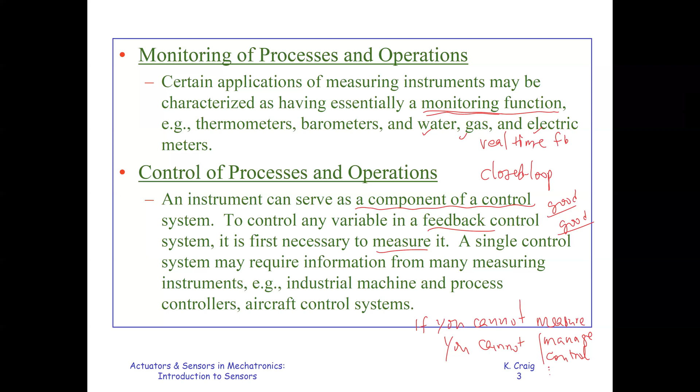A single control system may require information from many measuring instruments, so your decision could be based on multiple sources of information—like in industrial machine and process controls, aircraft controls, and so on. Your dishwashers, washing machines, and dryers also have control systems inside.

This is the first and second purposes of instruments and sensors. Now the third one: you design experiments, find new sensors, and make new discoveries, which is also very important. But as mechatronics people, we focus on 1 and 2. That's why we explained here.

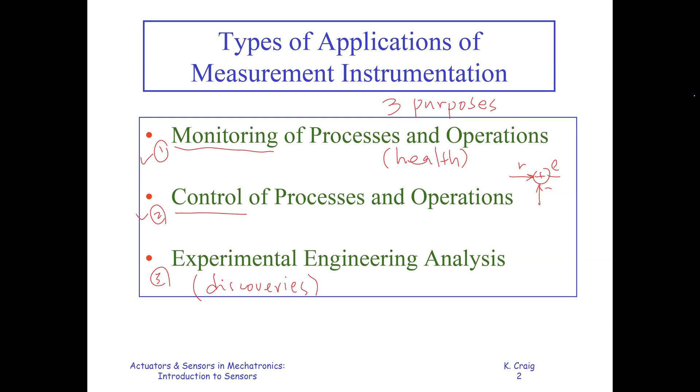So let's take this big picture. This is the plant to be controlled. You have some disturbance input in here—it could go in front or after, we put it in the middle, it's fine. Then we have the output, which we call Y. You have an input U, and you have disturbance D.

In process industry, they call Y the controlled variable, meaning a variable under control. So this controlled variable, you have to sense it—you have a sensor here. After that, you compare it to a desired value, like a reference. Sometimes we call this the set point.

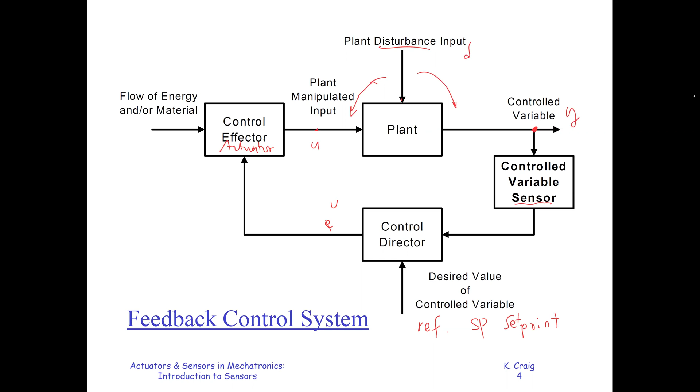Then we compare this, using the difference, which goes through the control director—so you have a control effector, like an actuator. Inside here is not just U, but probably a control variable, call it V here. So this is a typical feedback control system, and in all mechatronic systems you have this type of control.

For engineering analysis, you can do physics theoretical-based study, or you can base it on experimental study. To do experimental study you need sensors. Most of the time you need both—it's an iterative process.

Features of theoretical methods to study the engineering system: it's based on general physics principles, needing some simplification so you can establish a theoretical prediction. But this is always different from the real behavior—the model always has a difference from the actual physical system.

We talked about this—all models are wrong, and some of them are useful. Who said that? G.E.P. Box, his last name is Box. He has another colleague called Jenkins, so we talk about the Box-Jenkins model.

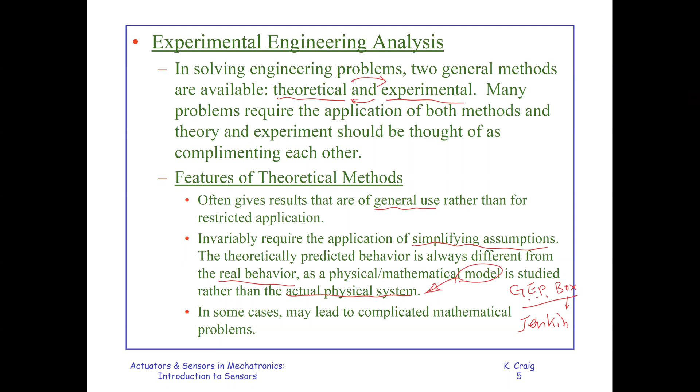This could be very complicated. A laboratory facility is not required in this case, since you only do simulation. You have Simulink, and in Simulink you have SimScape—SimScape Electrical, Hydraulic, and many other different packages.

However, a lot of the time we focus on experimental methods just for the specific system under investigation. In this case you are studying the real system, so you don't have to use simplifying assumptions—you're already running on an actual system. So we always view this as the true behavior of the system, and the measurements have to be accurate so we get a true picture.

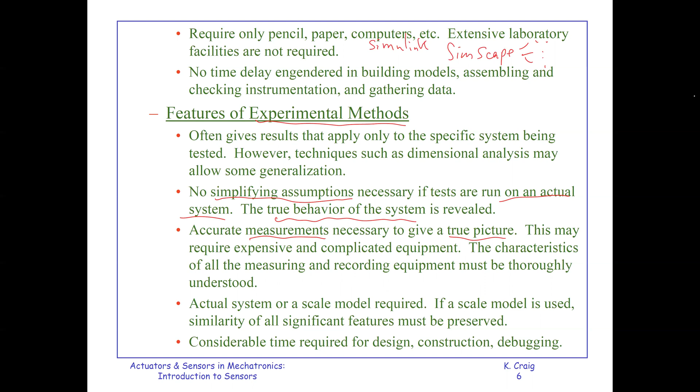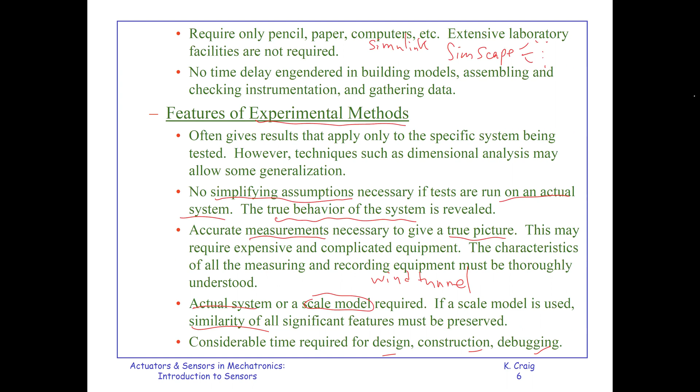Sometimes sensor equipment may be complicated and expensive, so sometimes you cannot measure directly on the actual system—you might use a scaled model. For example, you cannot put a full-scale aircraft into a wind tunnel, so you put a scaled model into it instead, and similarity of all significant features has to be preserved. This measurement method to explore engineering principles probably needs a lot of time for design, construction, and debugging of the experimental methods.

There are three purposes of measurement: sometimes you use sensors for monitoring, for control, or for analysis and discovery. The boundary may not be very clear cut—the category decided on may depend somewhat on your point of view, and the looseness of this classification should not cause any difficulty. These purposes may sometimes overlap or combine, or all three may apply at once.

So we use a lot of computers for these machines and processes. It is not the critical system element in terms of either technical or economic factors. So today, everywhere you can see computers, and even in your car, you have 20-some computers embedded inside.

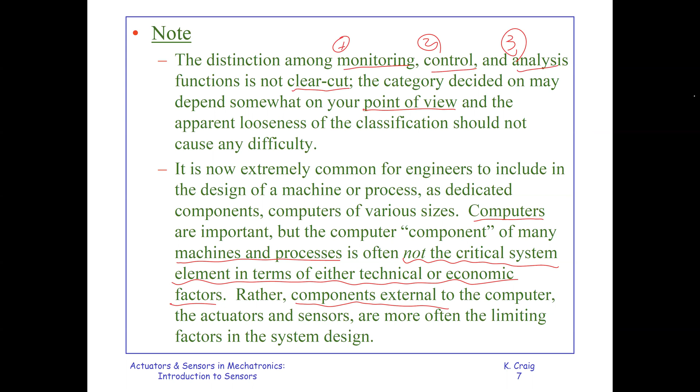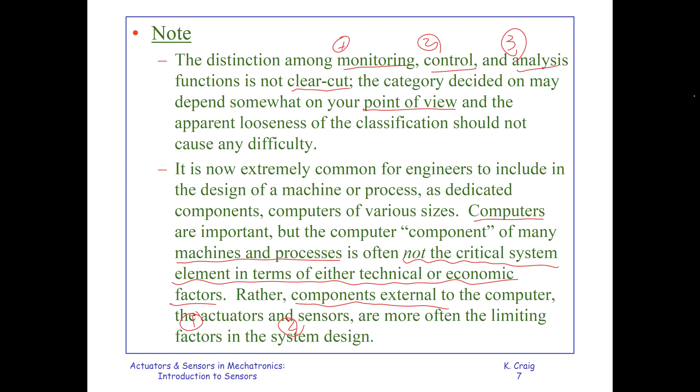So those components external to the computer are mainly in two categories. One is actuator, another one is sensor. In real systems, they are usually the main limiting factor or roadblocks for you to succeed. So it's healthy to discuss a generalized configuration and a function description of a measuring instrument.

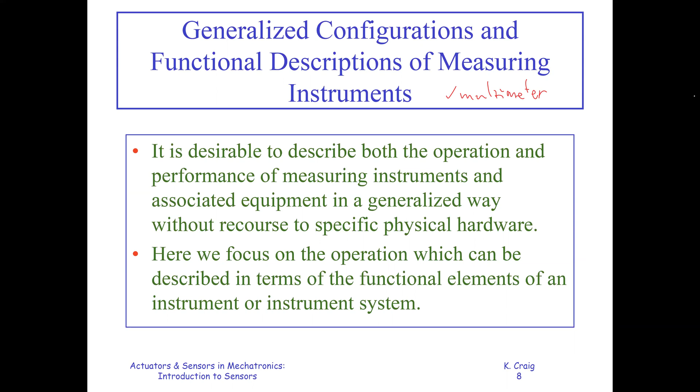So whatever instrument you have in hand, for example, let's say you have a multimeter you have been using in the lab setting, okay? So what is the general configuration there? I think it's a good idea we focus on this picture. Then we see a real instrument to see what each of the elements is.

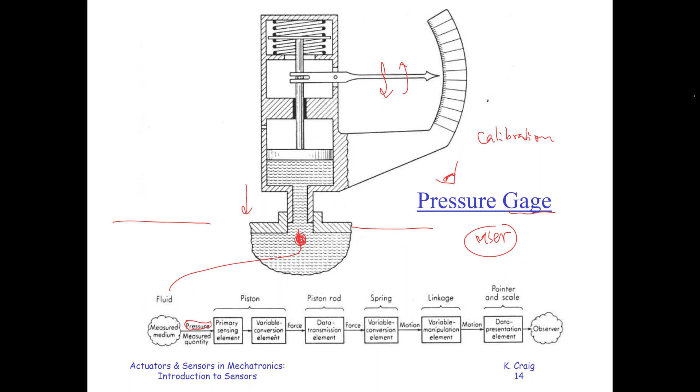This is one body, it's a piston that goes up and down. The piston is considered the primary sensing element. This is actually a conversion, it goes up and down. This is the piston rod. It's a kind of data transmission element. You transmit the force. I put an arrow here, the force acts on the rod, and the rod transfers the force. You also have force here. So the rod is data transmission.

These are the springs. This is called a variable conversion element because when you add force to the spring, it generates an up and down motion here. Then you do variable manipulation of the motion. This is the pivot point, and that's called a linkage. The linkage transfers the up and down rectilinear motion into a rotational motion. So this is rotational motion, and this is rectilinear, linear motion.

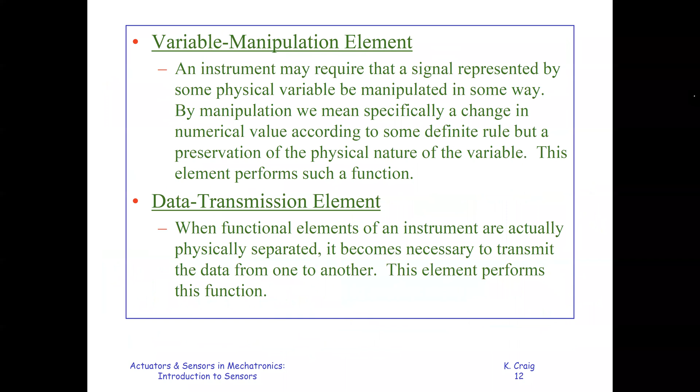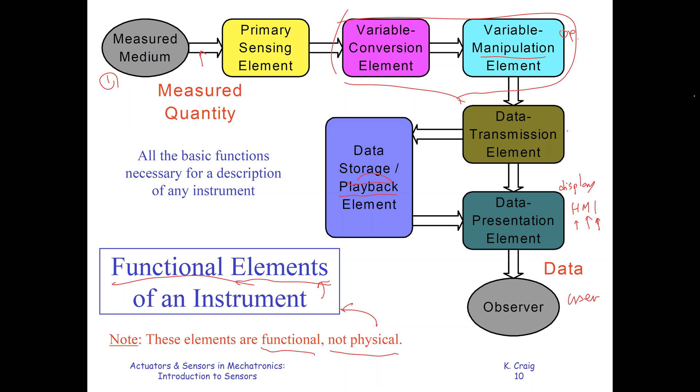So let me go through the functional elements to you again. So from the media, sensing element, variable conversion, variable manipulation, data transmission. But sometimes this could be combined, okay? So it could be combined as one. Okay, so I don't have to go through this text. I already explained it to you.

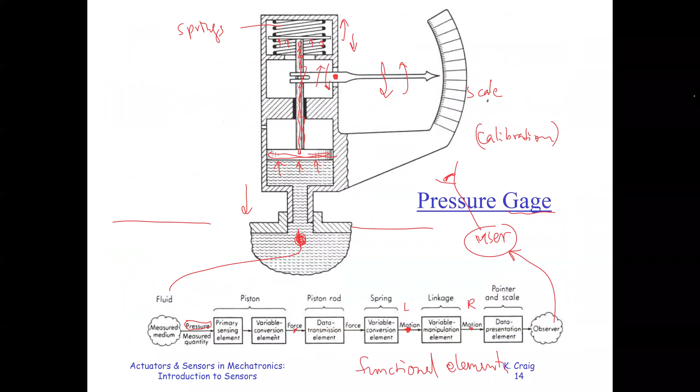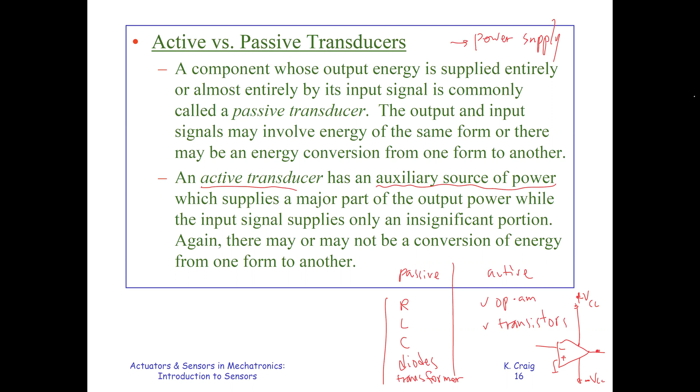All these are passive, but you remember in the op amp, you need the power supplies, plus VCC, minus VCC. So the output actually will be saturated by the maximum power supply. So that's called an auxiliary source of power supply. So it's an active transducer.

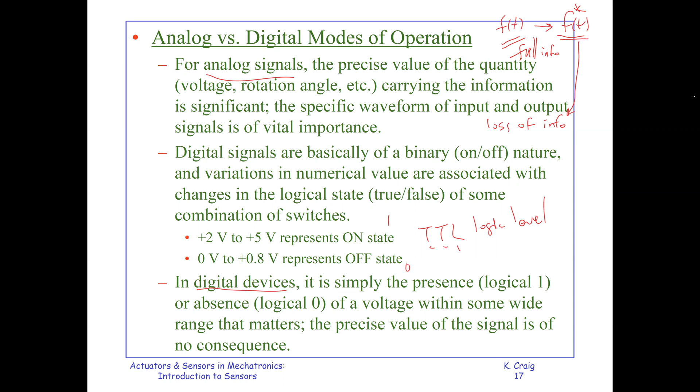Because of this logic definition, we can see that digital devices are tolerant or robust with respect to the noise. So, although individually they may not be very accurate, together they could be very accurate, depending on how many bits are put together to represent. So you heard about 8-bit, 16-bit, 32-bit, and 64.

So now in your Windows, everybody is using 64, but previously it's 32. I used 16-bit Windows before. In DOS, they sometimes began with 8 bits.

So sometimes a combined analog-digital system is used. In this case, it is called mixed signal. So the general accuracy limitation is with the analog portion. A digital part can be made very accurate.

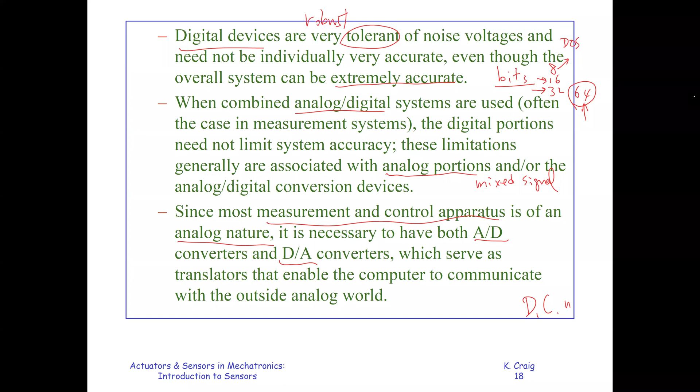So most of the sensing and control apparatus is of analog nature. So you should have analog to digital converters and digital to analog converters, okay? We have talked about this in our digital control module, which we just finished in the last 2 weeks.

So here, we should understand another thing about the input-output configuration of a measurement device. If you have an instrument, you measure an output, but you should understand this measured output from your sensor has two parts. First is the output component due to the desired input. So this is my desired input.

And you should also consider output components due to some interfering inputs. So these are interfering inputs, disturbances. But there's another thing called modifying inputs, which internally contribute to both sides. What does that mean? For example, nonlinear distortions, some non-ideal situations, will actually modify my input signal. They will add towards that.

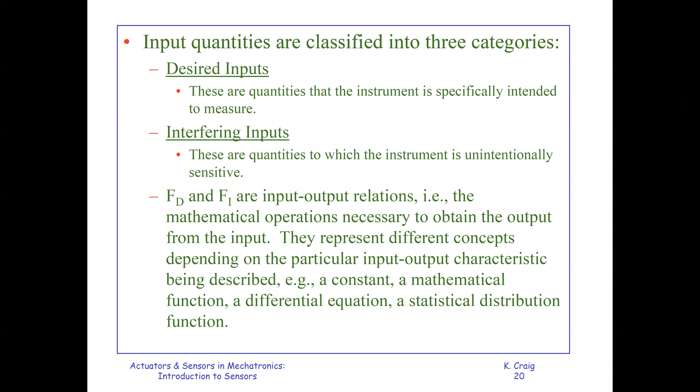Say for example, I have a test specimen here. Then we put a small strain gauge patch on here and pull out 2 leads. Those leads will give me a signal of my strain. Let's say this is epsilon. But this signal is very small.

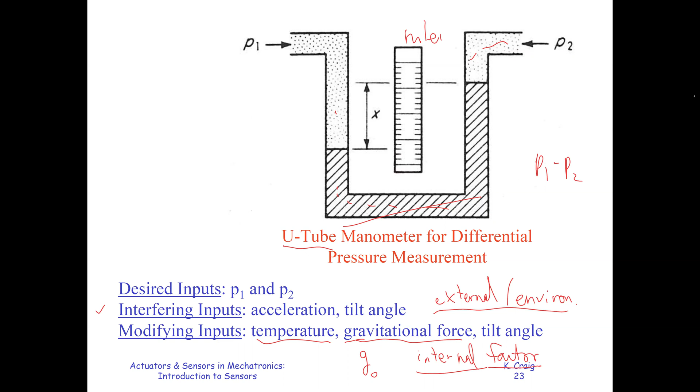Yeah, it's true. So you can imagine that the G is different at different elevation above sea level, with different height, okay? The gravity constant is different. Temperature, yeah. Temperature is changing the liquid and also gas properties. So we can identify these three different types of inputs. So when you get measurements, this is a ruler, you can read off this difference. So it's proportional to that x, right? This x.

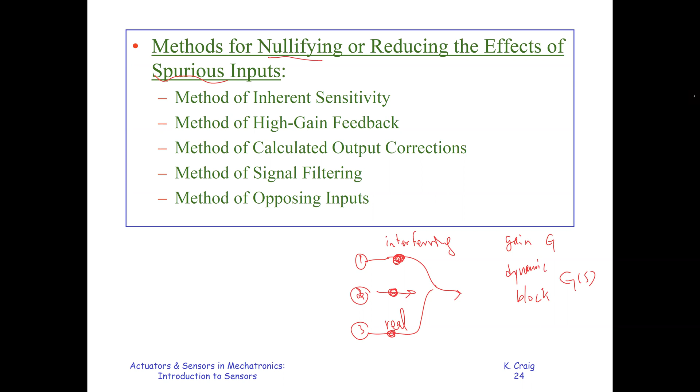So this is a second example. And now the question is, given a measurement, you probably have three contributors, okay? The first is the real one. This one is interfering. Then this is modifying. And of course you have some gain factors here, right? But it's not just the gain of G, it could be a dynamic block, okay? So what do we say? G of S, right? So if you have those exogenous inputs, how are you going to remove them, nullify, or just attenuate them?

Okay. So there are 5 categories of methods, okay? One is you just try to make the sensor inherently less sensitive to those external interfering noises. So you change the sensitivity. Another one is you use high gain feedback to suppress all these effects. Another idea is you do a correction. You make the output go through some corrections to nullify those effects, okay?

Of course, most commonly used probably is signal filtering. You try to do some filtering. So you have heard about low pass filter, high pass filter, band pass filter, okay? Band pass filter, there are 2 types. One is a band stop, okay? And band pass. I'll show you this one later. Another idea is you just cancel it. You try to find out the same value using opposite inputs. So we're going to go through some of these.

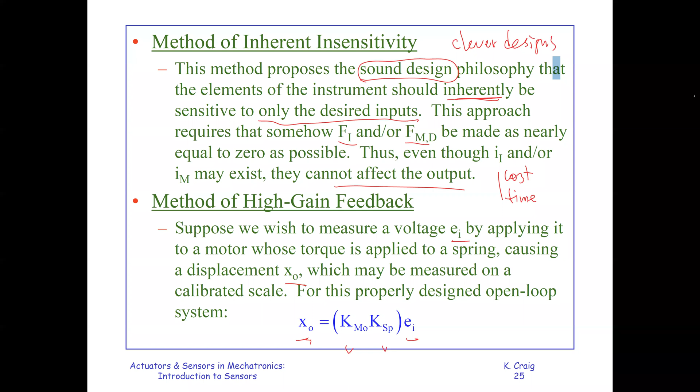So the second idea is to use a high gain feedback, okay, to measure voltage EI applied to a motor. A torque is applied to a spring causing displacement X. So measure on the calibrated scale. So a properly designed open loop system is simply from EI to X0. So you have two gains in here. So modifying input, so you have something you don't want, but it's still trying to modify you, they exist.

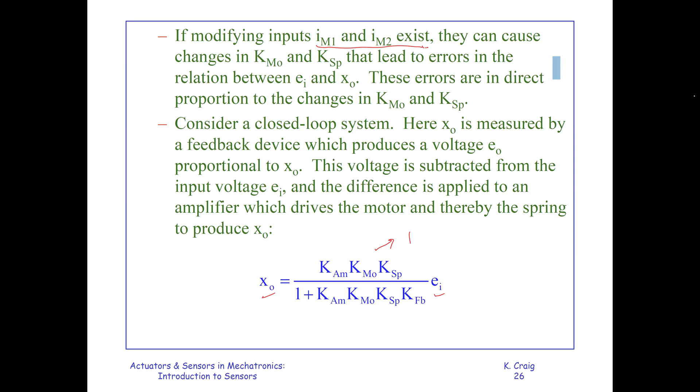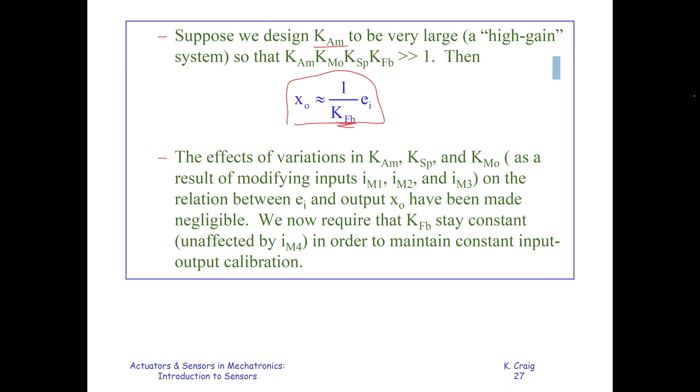So it's only affected by this one, so it's not affected by the modifying factors, okay? So it's not affected by those modifying inputs. Modifying inputs. So let's see the high gain feedback thing here. So you have an open loop system like this, you have voltage EI, so you have X0 in here.

So originally you are having this, but if I can find out a feedback mechanism to make this one feedback, so you can see, if these intermediate interferences, this will not affect us a lot, okay? Also, there's something here. So it's not going to affect us because of this feedback structure, and we keep this guy big, okay? So that's another idea.

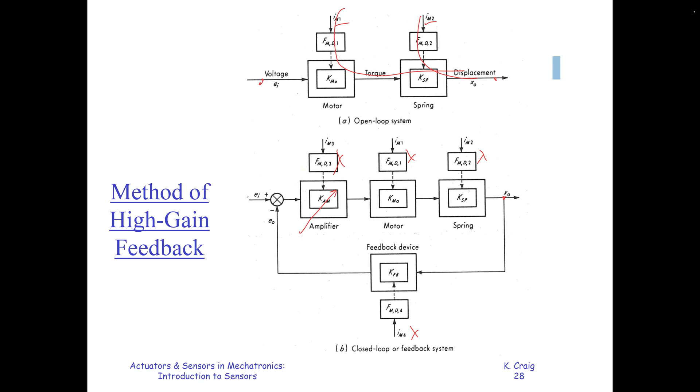Otherwise, this one will affect X0, this one will affect X0, so it's difficult. So how to reduce the effects of this IM1, IM2? I introduced the feedback mechanism, okay? So this is called feedback mechanism.

Calculated output corrections. So you should be able to measure and estimate the magnitude of the interfering and modifying inputs, and quantitatively how they affect the output. Then you minus, you just calculate it. So that's another idea to do that. But the condition is you have to be able to measure or estimate the magnitude of the interferences. Sometimes the interferences are simply not possible to measure. So this method is not valid. Okay.

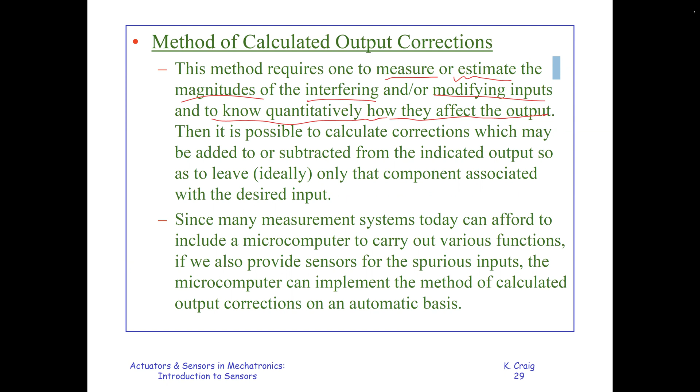So we want to put a little bit of emphasis here regarding the method of signal filtering, introducing certain elements, or we call them filters, into the instrument. So their effects on the output can be removed or reduced, okay? Reduced. Any suitable signal in the instrument, input, output, and the intermediate signal, you can always try to filter them. So here is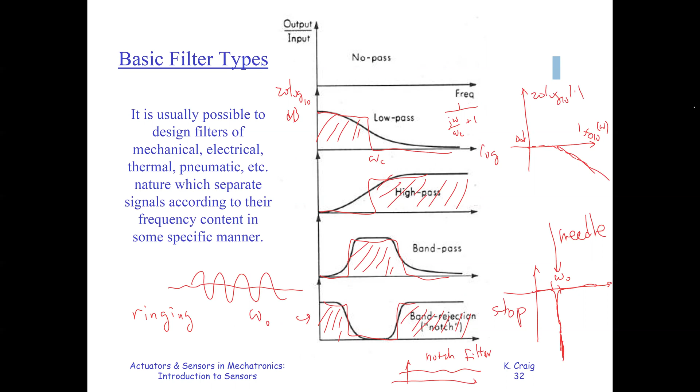So in Chinese medicine, there's a thing called acupuncture. When your system is ringing like this with harmonics, sometimes called ringing, you can even hear it, you feel it. So how do you remove this? We call this something with sickness, so you need acupuncture, you need a needle, you need a notch. It's very funny.

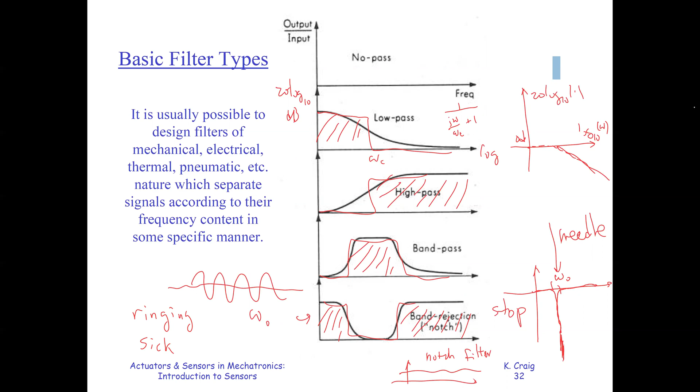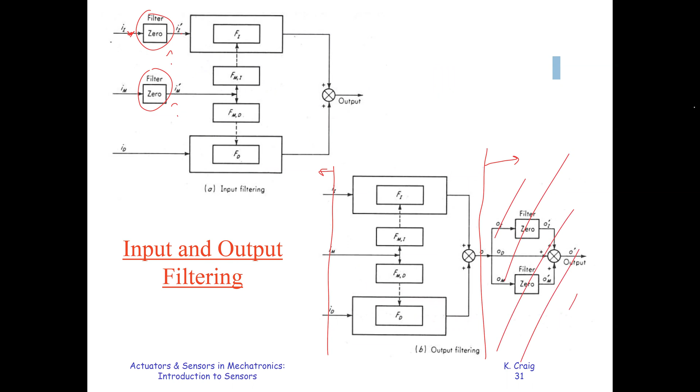So let's see an example. We just saw the strain gauge circuit, something like this. So then we pull out this signal, and this is our post-processing, like what we did here. We are doing post-processing.

So in this one, I can see this is a low-pass filter. But if you swap the position of R and C, there will be a high-pass filter, right? So in this one, we are not using a log-log plot, so you don't see it nicely, but this is just a simple case. So you have 2 Hertz, it's a roll-off, and here is 60 Hertz.

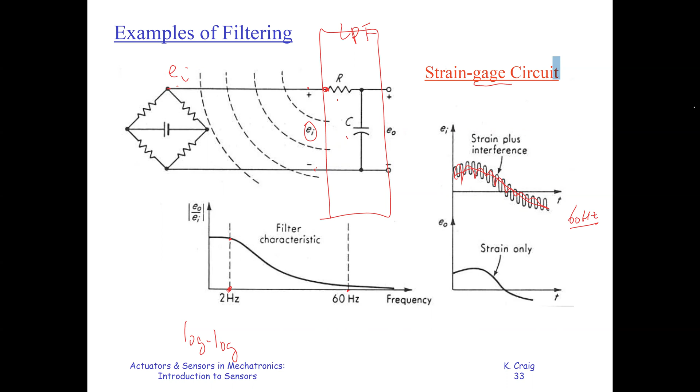I have a signal, Ei is here, this is Ei, from here to here. And this Ei is a signal superimposed with all these sinusoids. This is due to perhaps my 60 Hertz power supply or lighting, and it looks like this. I want to remove this 60 Hertz on top of this, and this is the strain signal with interferences.

So what you should do is add this low pass filter, then the output E0 here will remove those harmonics, and the harmonics is here. If you don't remove it, it's 100% still there, okay? But if you remove it, this one may only be like 1.1%. So that's attenuation.

What we call attenuation. So if you enlarge, you can still see something on top of it. It's not 100% removed. So if you really want to do 100% removal, you can. What you should do is cascade another RC here.

So what does that mean? It's like you have 1 over j omega divided by omega c. So omega c is 2 Hertz here. So if I do omega c plus 1, this is my transfer function. If I have 3 of these cascaded, I put 3 in here, then my rolling off is much faster.

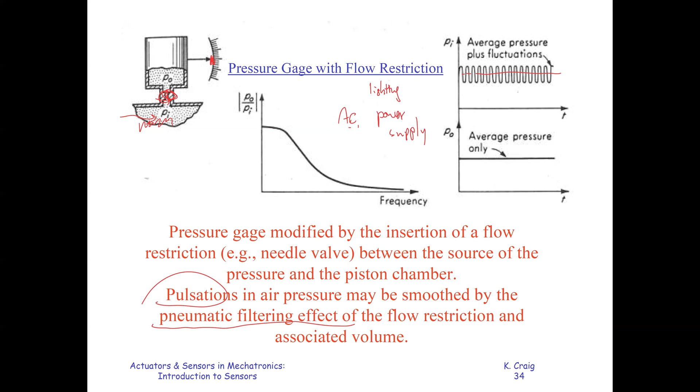So we can use the pneumatic filtering effect of the flow restriction. By doing that, you have a restriction here, so basically you narrow the path, so that the pulsation in the air pressure may be smoothed by the pneumatic filtering. I hope this is just for illustration - you don't have to go through an electronic low pass filter, you can use some other means.

So there's another example called the chopped radiometer. You have an infrared radiant source, and a rotating shutter called a chopper rotating this way. The receiver gets a very small signal. Then you put this through AC amplification, a small signal amplifier.

On the other hand, this chopped signal has an ambient light source interference. So you get a signal like this, with a drifting low frequency trend. What you really want to keep is the high frequency part, and remove this drifting trend. This is my TS only, so TS is here.

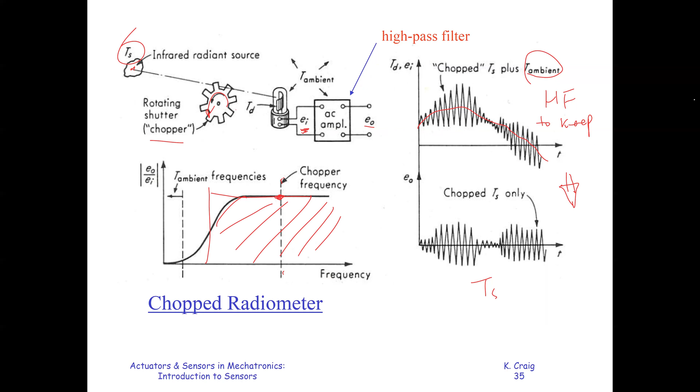So how do you do that? You let the high pass filter stop the low frequency. The chopper frequency is here, so it gets passed, and the low frequency gets attenuated. Then you'll see this signal becomes this signal. This is beautiful - this is a high pass filter application scenario.

So that's the last one, called opposing input. You have your iD here, and you have unavoidable interfering inputs that you cannot avoid. However, you can intentionally introduce some inputs such that these can be canceled out, so there's nothing here - you get everything going through this. That's called opposing input, to counteract that interference.

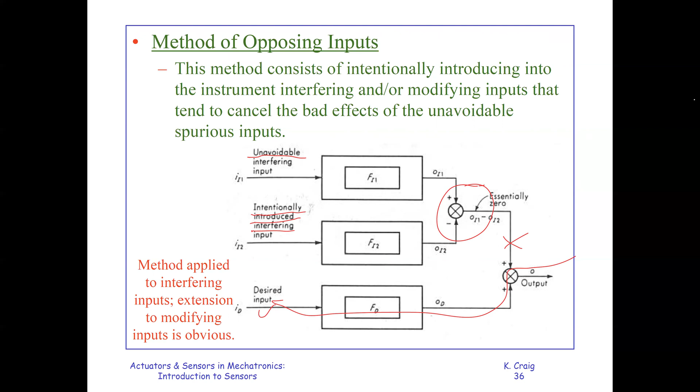This is called intentionally introduced inputs that you can design. So opposing inputs - I want to say not opposing, but compensating. You try to reduce the effect. This is called a millivoltmeter, which measures a very small signal.

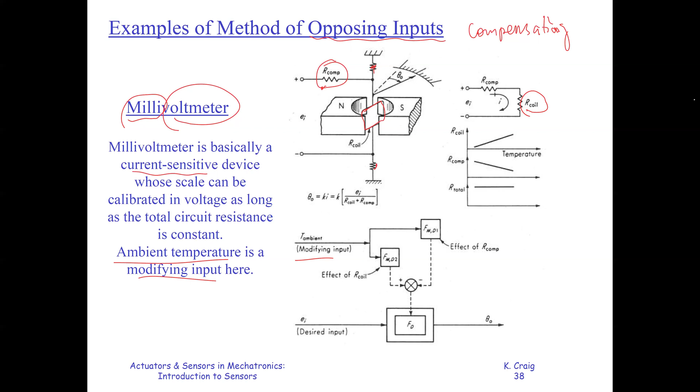This can be added together to cancel each other out. In other words, my original coil resistor R is changing over temperature, then I add a compensator going the opposite direction, so the total R is constant. That's called opposing inputs.

We can have more examples, like measurement of mass flow rate of gases, or a rate gyroscope. There are many different ways to compensate the modifying inputs.

I hope you enjoy this deck of slides. Let me summarize: we talked about the three purposes of sensors and instruments, the functional elements of an instrument using a basic sensing element, with some examples. After that, we discussed how sensor output is affected by modifying inputs and interfering inputs, then five different ways of compensating those interfering inputs.

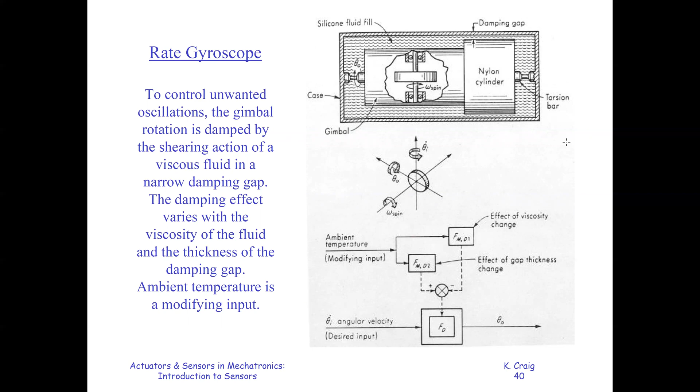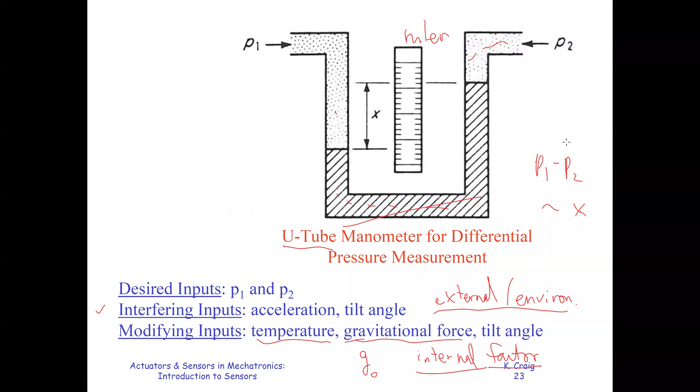So you have three types of inputs: modifying inputs, interfering inputs, and real inputs. We have five ideas. One is using the inherent sensitivity, making it insensitive to those external disturbances.

Another idea is a high gain feedback idea. Then we do a calculated output correction method. We put emphasis on signal filtering. And last, we mentioned adding opposing inputs to compensate those interfering signals.

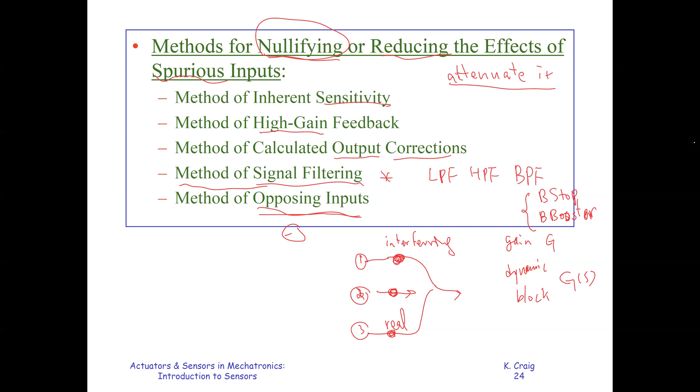So with these techniques we use this word called nullifying, reducing, compensating, or attenuating those spurious inputs, including interfering inputs and modifying inputs. These are all considered things we don't really want, so we have some systematic ways to remove it, reduce it, cancel it, or oppose it, and so on and so forth.

So I'm going to pause, and next week we are going to continue talking more specifically on mechatronics sensors, motion sensors. And then we are going to switch to actuators.